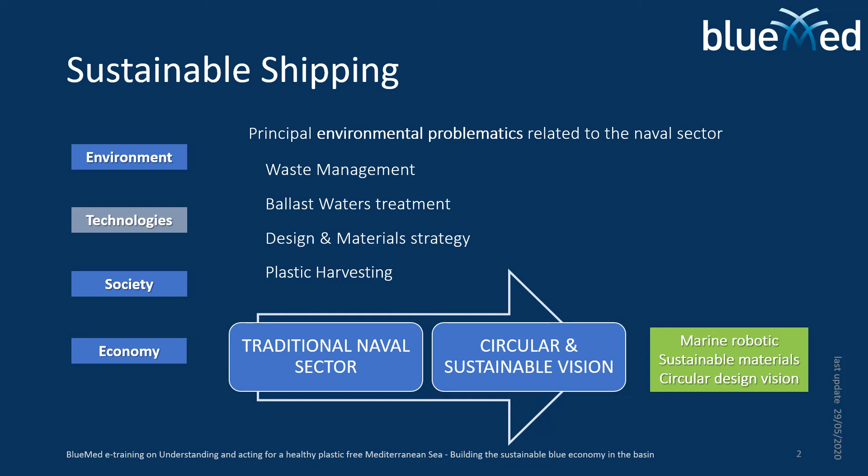Waste management is one of the main problematics related to the sector. The ship waste can be classified in oil, sewage, plastic, and waste generated by common operation and accidental or not common ones, like oil spill problematics.

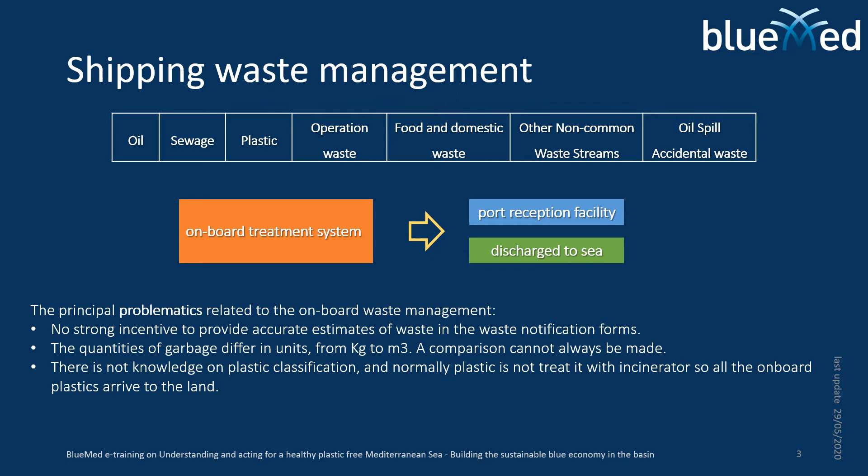In general, all these wastes are treated with onboard systems and their results can be directly discharged to the sea or sent to the port facility. The main problematics in this management concern the absence of incentive for the accurate estimation of the waste, and problems in classification and comparison between these wastes, especially for plastic, because there is no knowledge in their classification, and normally they are not treated on board but sent directly to the port.

In recent years, these problematics are overcome by creating a new generation of circular and sustainable ships. In fact, the waste can be reused for the creation of energy for secondary operations for big ships, like thermal or electric energy, or they can directly produce fuel for small vessels. From this waste, energy can also be generated to drive the treatment itself, creating a circular view.

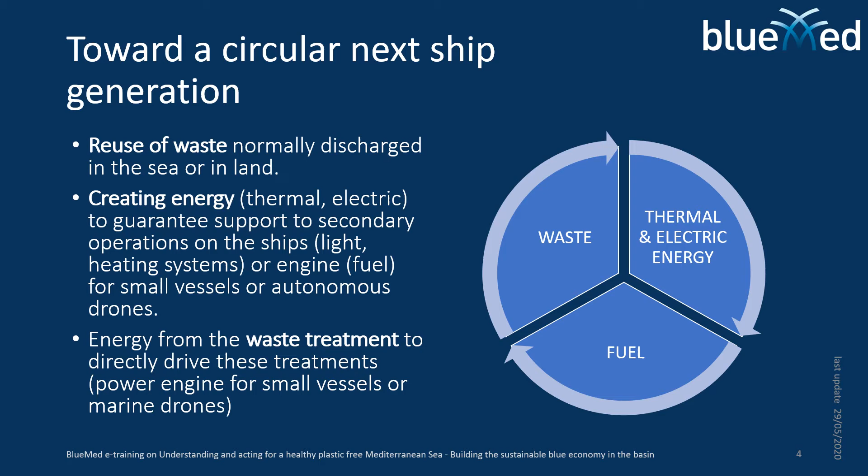In this way, it's also possible to obtain a minimization of the waste sent to the port by optimizing their fluxes.

Another environmental problematic is related to ballast water. This is water directly discharged to the sea, causing the extinction of native species, effects on local and regional biodiversity, effects on coastal industries which make use of the water, and of course effects on public health and impact on local economies, which are in particular based on fishery.

Normally, traditional technology like electron beam radiation is used to remove contaminants from this water.

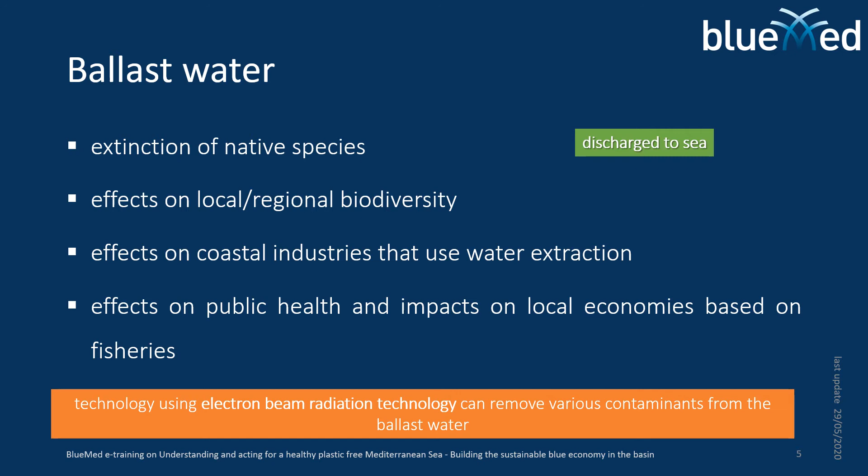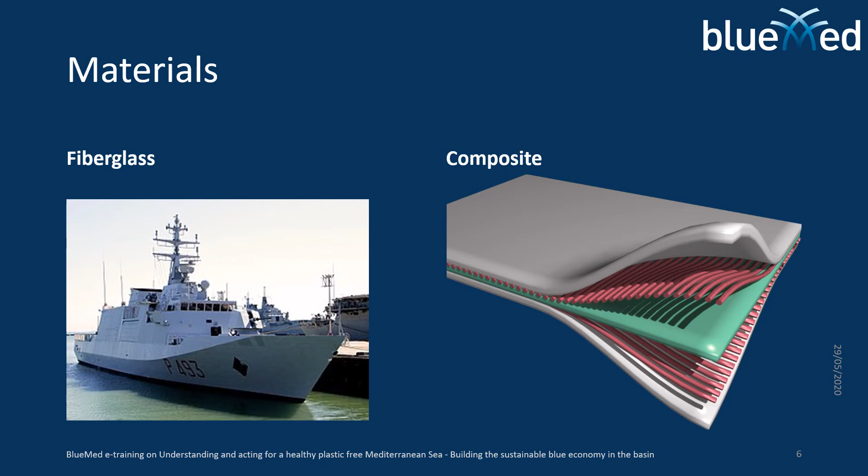The problematic of ship materials is also very important. The majority of ships are made by fiberglass, a very common material, but it's not eco-friendly and it's quite difficult to recycle. In recent years, composite materials are used in ship design to reduce the ship weight, the fuel consumption, and so their cost. Moreover, the recycling of this material is still an open problem.

The biggest problematic in this sector is that ships have not been designed by considering end-of-life disposal. For this reason, innovative sustainable design implies the use of characteristics such as modularity and reconfigurability of the ship. In this way, it's possible to guarantee faster maintenance without stopping the ship, a cost reduction, and the differentiation of mission, going towards an optimization of the design process.

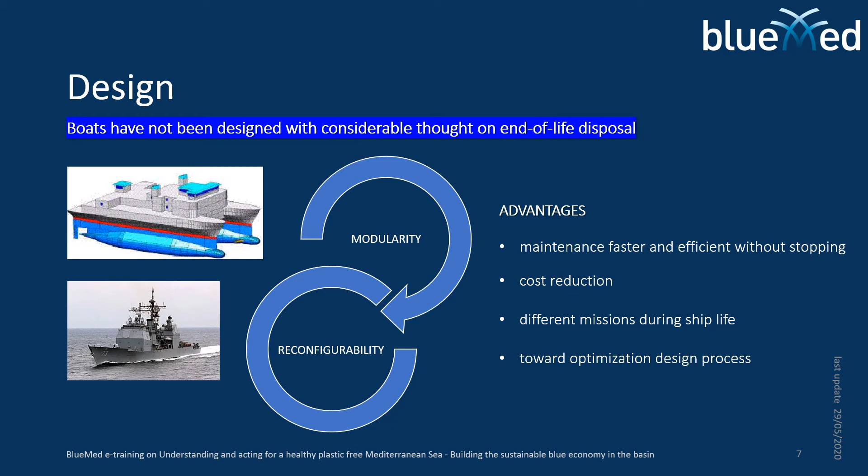Plastic harvesting is a focal problematic in recent years, especially for the Mediterranean Sea. Marine robotic technologies like marine or aerial drones can be used for this purpose because they can avoid the problematics of dimension and density diversification of plastics.

These parameters are fundamental in the study of plastics, which can be classified in micro and macroplastics depending on their characteristic dimension, and the harvesting process requires technologies which can operate in different conditions. The same consideration is valid for the differentiation of plastic density, and in this way robotic technologies can catch plastic which is floating, in the water column, or directly on the seabed.

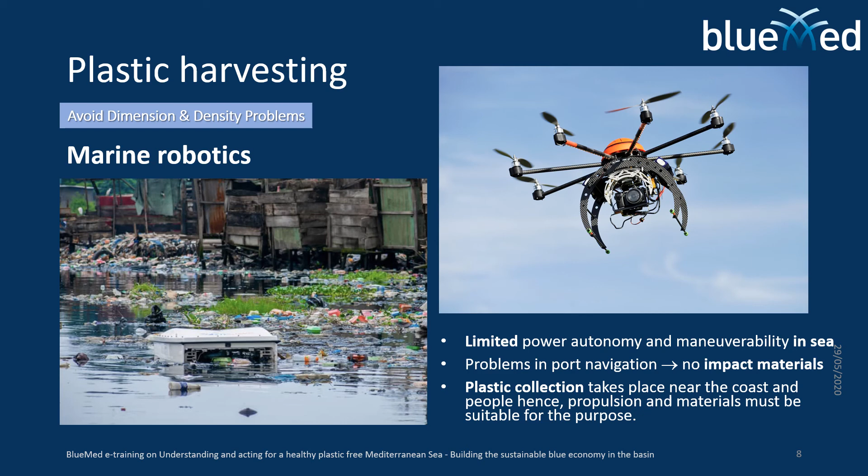Moreover, these technologies are limited by their power autonomy and maneuverability, so they cannot operate in the open sea but only in small waters like rivers, lakes and port channels. They are of course suitable for this purpose because in recent years they are made by eco-friendly materials and propulsion.

Another interesting technology used for plastic harvesting related to the naval sector is the vessel Rev Ocean, designed by Fincantieri. This is a research vessel used for exploration and environmental activities.

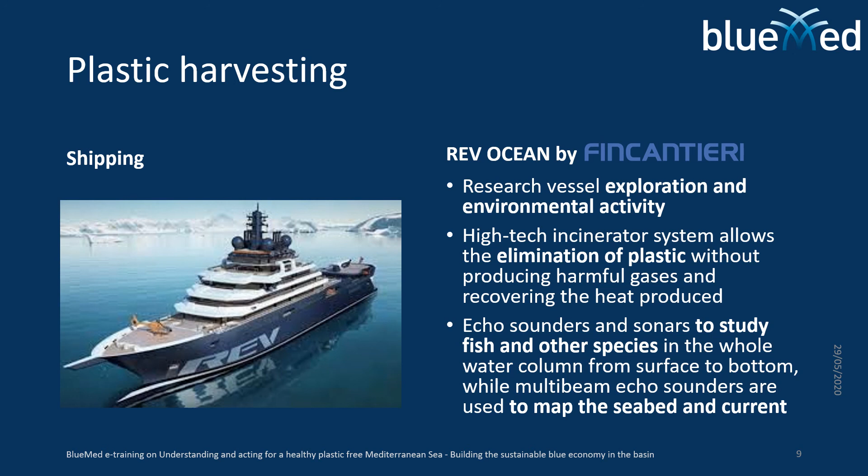A high-tech incinerator is on board in order to eliminate plastic without producing dangerous gases, recovering the heat produced by this operation. Other technologies can be found on this vessel to study fish and other species, and also to map the seabed and the sea current.